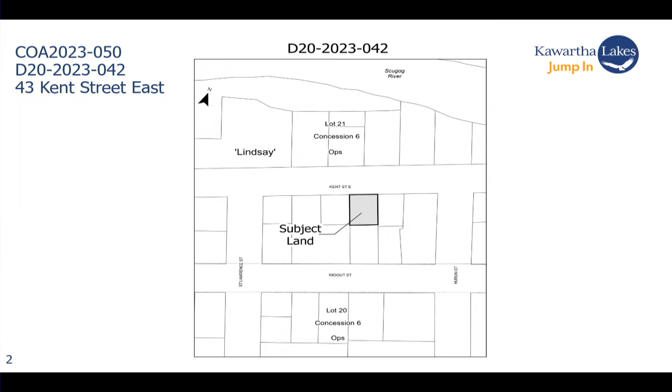The subject property is located in an established residential neighborhood east of downtown Lindsay and south of the Scugog River, separated from the river by residential properties as well as Old Mill Park. The property contains a 1.5-story single detached dwelling with a basement, constructed in 1947, and a shed.

The purpose of the application is to facilitate the construction of a 2-story addition with a basement onto the back of the existing dwelling, as well as the construction of a second story onto the 1.5-story existing dwelling.

Section 8.2C of the bylaw requires a front yard setback of 7.5 meters; the existing setback is 2.13 meters. Section 8.2F of the bylaw requires a rear yard setback of 7.5 meters; the proposed setback is 3.35 meters.

Please note that an amendment to the third relief is required, as it should read that Section 8.2H of the bylaw permits a maximum gross floor area as a percentage of lot area of 40%, not as a percentage of lot coverage. So again, on the first page of the report, relief number 3 should read: Section 8.2H of the bylaw permits a maximum gross floor area as a percentage of lot area of 40%. The proposed gross floor area is 89% of the lot area. This amendment is also required to the text box on the sketch in Appendix C, but the correct wording can be seen here on the slide.

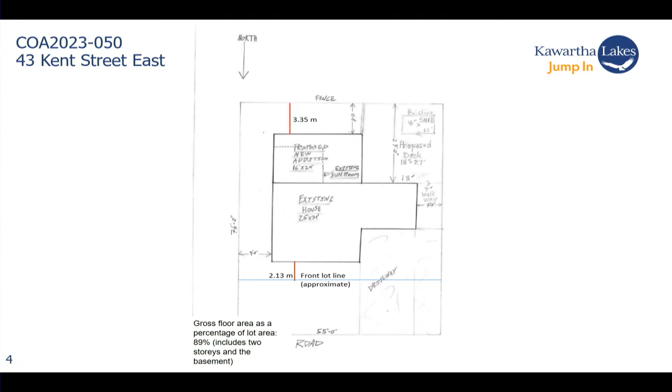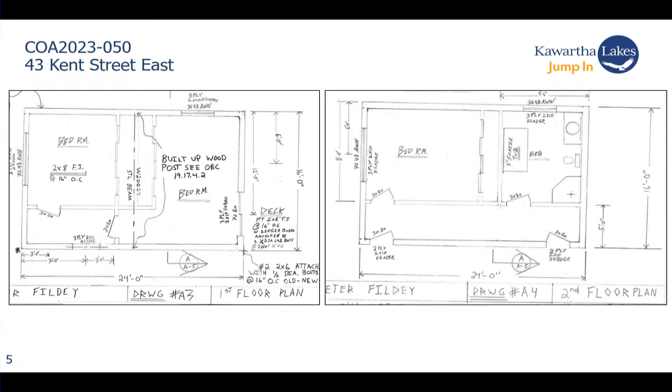The proposal is to construct an addition onto the back of the existing dwelling. This addition is to be 2 stories with a basement, for a total of 3 levels. Here we can see the floor plans for the first and second stories of the proposed addition, and here the floor plan for the basement of the proposed addition.

The proposal is also to convert the existing partial second story into a full story, making the entire dwelling 2 stories with a basement for a total of 3 levels. This proposal will add additional living space, a bathroom, and 3 bedrooms.

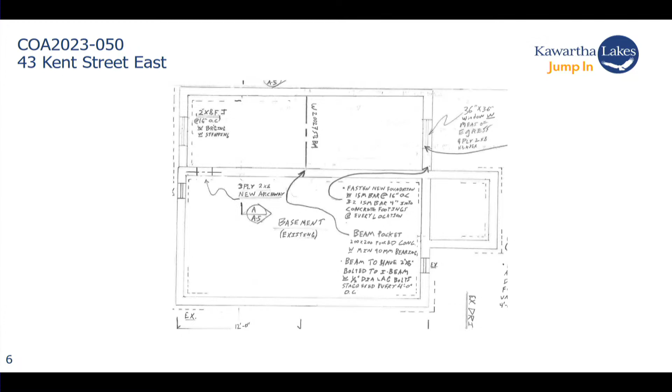As the Lindsay secondary plan portion of the City of Kawartha Lakes official plan is under appeal, the Town of Lindsay official plan applies. Within the residential designation, residential uses, as well as buildings and structures accessory to residential uses, are permitted, with performance and siting criteria being implemented through the zoning bylaw.

The intent of the minimum front yard setback is to ensure adequate spatial separation between built form and the traveled portion of the street, to create a streetscape in keeping with the residential character of an area, and to maintain features such as sightlines.

The proposal is to convert the half-story to a full story, which complies with the maximum height within the R3 zone, and is not anticipated to alter sightlines. Additionally, there is adequate spatial separation between the dwelling and the traveled portion of the road.

The front lawn continues past the front lot line of the subject property, extending to the edge of the road, with the distance between the dwelling and the edge of the road being approximately 6 meters.

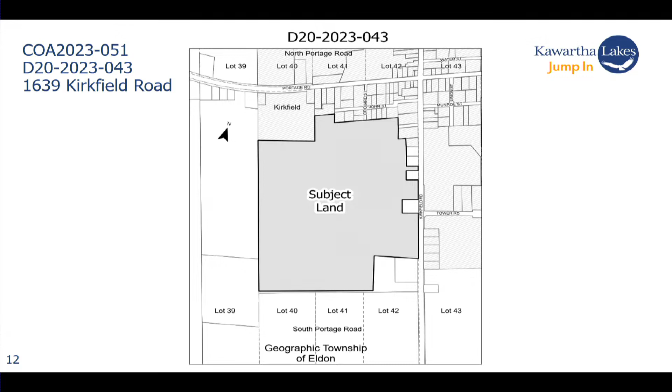Based on the Municipal Property Assessment Corporation, the benefiting lands being 1653 Kirkfield Road contain a single detached dwelling and a detached garage. On the second page of the report, under the official plan review, I mentioned that the retained lands are vacant. This section should be amended as the retained lands currently contain a single detached dwelling, a barn, and an attached garage.

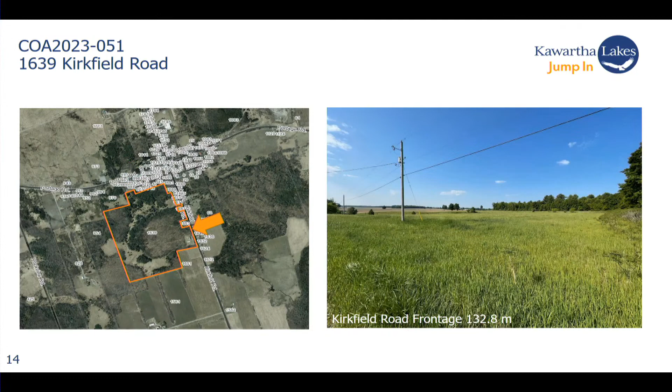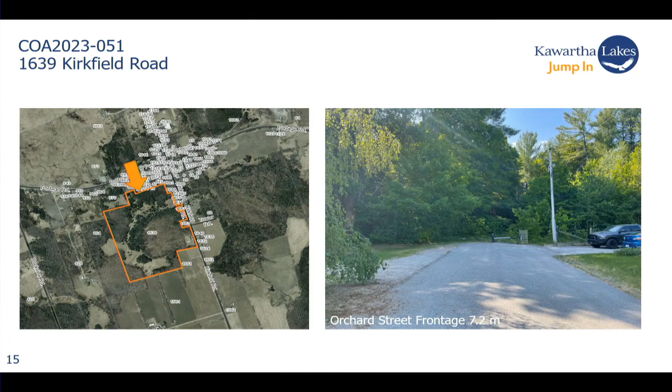The subject property is zoned agricultural zone under the Township of Eldon zoning bylaw. The proposal complies with the provisions of this zone with the exception of the minimum lot frontage. Section 7.2.1.2 of the bylaw requires 230 meters of frontage for properties zoned A1. Due to the severance, the retained parcel will have approximately 140 meters of total frontage on an assumed public street.

The intent of this zone provision is to ensure lots are large enough to accommodate development and to adequately provide amenity space, private services when required, and stormwater infiltration. While the retained lands do not comply with the minimum lot frontage, the proposal meets the minimum lot area under the A1 zone. Therefore, the lot size may adequately accommodate potential development, amenity space, and space for water infiltration.

The minimum lot frontage requirement also ensures the property can accommodate a building envelope with the appropriate width of a lot while still complying with the minimum side yard setbacks. The retained lot is wide enough for future development that can easily comply with these yard requirements under the A1 zone, including the installation of an unencumbered private sewage system. Therefore, the proposal maintains the general intent and purpose of the zoning bylaw.

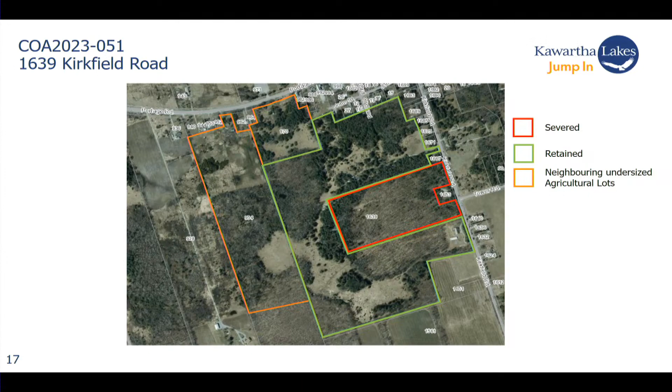No additional comments, concerns, or objections were raised by members of the public or circulated agencies. Based on the contents of the report, staff acknowledges the application meets all 4 tests of a minor variance, and staff respectfully recommends approval of the application subject to the conditions identified in the report.

Thank you. Thank you, Ms. Peck. Other questions of the planner? All right, being none. Mr. Carroll, I see you sitting there. Do you wish to speak to the application?

Yes, thank you, Mr. Chairman. The recommendation at item 1 under relief sought, using the measurements referred to by staff, if you approve 160 meters, the application property does not comply with the 160 meters. You cannot round up. You can round down, but you cannot round up. If you approve a minor variance that says the frontage is acceptable, authorized at 160 meters, we already know to 2 decimal places, it's 159.77. So if you would agree to change 160 to 159, that addresses that concern.

The second one, Mr. Chairman, deals with condition 1. My client cannot fulfill condition 1, and my client cannot fulfill condition 2.

All right, I'm going to go back to Ms. Peck. Did you hear what Mr. Carroll had to say with respect to condition 1? Through the chair, yes. So I am comfortable setting the total frontage at 159.77 meters.

In terms of addressing the member's question about that green retained frontage, that little piece—I'll point to it here, right here—that is not counting towards the total lot frontage because that is an unopened road allowance. It's not like Pine Street, it's not on a municipally improved road, so it doesn't meet the definition of lot frontage. So just to clarify, we have the frontage on Orchard Street, and then we have the frontage on Kirkfield Road.

In a cover letter that was sent on April 24th, 2023, from Mr. Doug Carroll, it does request a lot frontage of 7.62 meters on Orchard Street and 152.15 meters on Kirkfield Road, which when summed is 159.77 meters.

This is as clear as mud. Ms. Archer, go ahead. It still seems to me, if we approve even 160 or 159 point whatever, the sketch—and Mr. Carroll says, I believe, his client gave him the number of 132—if we approve 160 or 159, they're still not going to have enough. Ms. Peck, I have to keep going back to you.

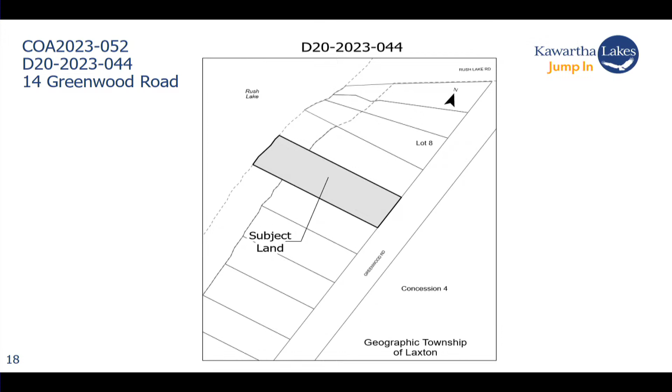Thank you, Mr. Chair. The subject property is located in an established waterfront community located along the east shore of Rush Lake, approximately 600 meters from the intersection of Rush Lake Road and Monk Road. The subject property abuts similarly sized residential lots to the north and south, with a large agricultural backlot located at the dwelling's rear on the east side of Greenwood Road. As expected, over time, owners may wish to improve their property to achieve its highest and best use.

The proposed ARU will not require any exterior building additions, expansions, or reconstruction. The applicant is proposing an internal retrofit of the garage's existing upper level, which currently provides storage space, to accommodate living space as well as a kitchen and bathroom facility. An ARU will provide additional living space to accommodate the owner's family and friends, specifically their daughter who visits during the summer months. An ARU also provides the potential for rental tenure and supplementary income opportunities if desired. This may assist the city in meeting its rental housing and affordable housing objectives. Therefore, the development is desirable for the appropriate development or use of the land, building, and structure.

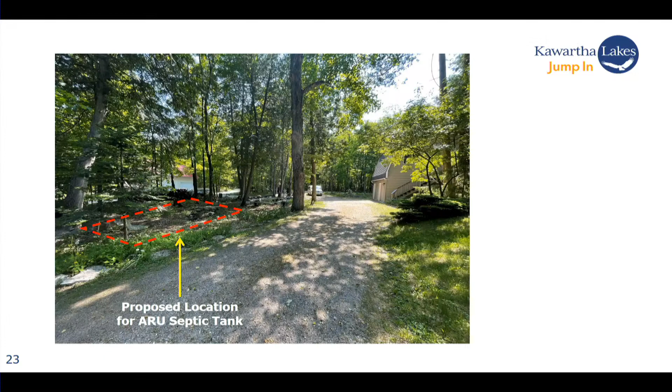Additionally, should the sewage system servicing of the dwelling unit fail, a replacement alternative system can be accommodated on the lot. As such, the Building and Septic Division has no issue with the proposed minor variance as it relates to on-site sewage disposal. Therefore, the variance maintains the general intent and purpose of the official plan.

The subject property is zoned limited service residential under the United Township of Laxton, Digby, and Longford zoning bylaw. The LSR zone permits a single detached dwelling and a detached accessory structure, as well as accessory uses, such as an ARU. Section 18.31 VI of the bylaw permits an ARU as of right on lots 4,000 square meters in size where private services are proposed.

The subject property is 2,024 square meters in size.

The intent of the minimum lot area requirement is to ensure that an adequate carrying capacity of land is maintained to accommodate the necessary sewage system upgrades and water demand.

To facilitate the proposal, the owner is installing a second septic system, and the garage's upper level will provide an additional 12.8 square meters of living space, which is not anticipated to significantly increase the property's water demand.

The proposed ARU will be located on the upper level of an existing building, and no exterior alteration is required. The existing garage complies with all of the yard requirements for a detached accessory structure, and the lot meets all other ARU eligibility requirements under the zoning bylaw.

Therefore, the variance maintains the general intent and purpose of the zoning bylaw.

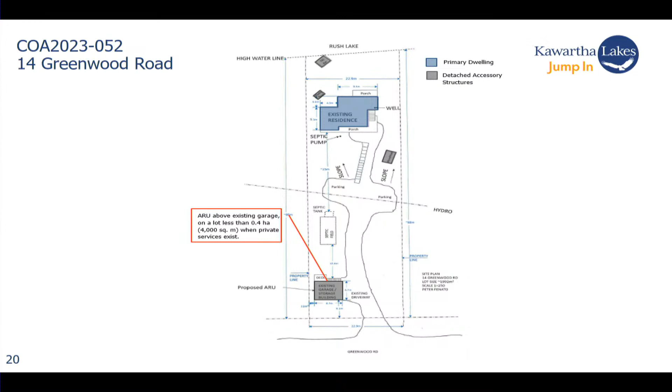There are no anticipated impacts on environmental features, neighboring properties, or the function of the municipal right-of-way with respect to access, drainage, streetscaping, and maintenance, and therefore the application is considered minor in nature.

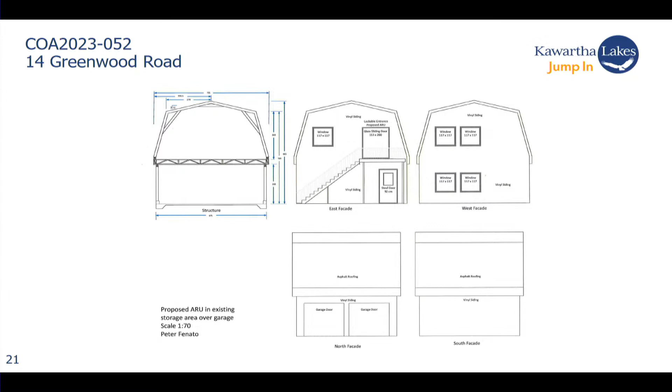No other comments or concerns and comments of objection were received by members of the public or circulated agencies. Based on the contents of the report, staff acknowledges the application meets all four tests of a minor variance, and staff respectfully recommends approval of the application subject to the conditions identified in the report. Thank you.

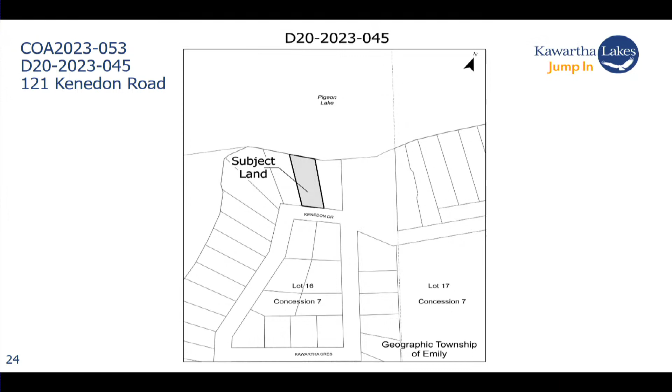Yes, thank you. The subject property is designated waterfront under the City of Kawartha Lakes official plan and is zoned rural residential type 3 under the Township of Emily zoning bylaw. The subject property is located in an established residential neighborhood on the eastern shore of Pigeon Lake. The property is rectangular in shape, has frontage on the water, and contains a one-story single detached dwelling and a shed.

The purpose of the application is to recognize the existing non-complying side yard setback of an addition to the dwelling, which was constructed in 2017. In 2017, the previous owners were issued a building permit to facilitate the addition. The plans submitted to the Building and Septic Division showed a side yard setback of 5.59 meters. In 2020, when the current owners purchased the property, it was discovered there was an open building permit for outstanding deficiencies, which the current owners addressed. At that time, they had a survey done for the purposes of building a fence, and through that survey it was determined that the setback between the side lot line and the constructed addition is 2.85 meters. The required minimum interior side yard setback is 3 meters.

Site plan compliance is a component of a building permit, and the Building and Septic Division cannot close the open permit without the existing non-complying setback being addressed. The owners have taken steps to address this deficiency by submitting a minor variance application for the purposes of closing the building permit to achieve clean title for the sale of the property.

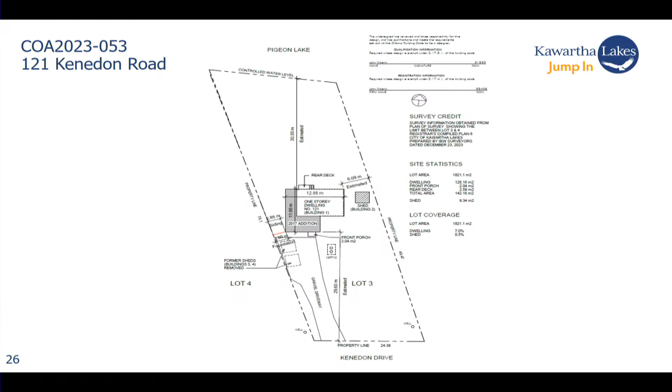Looking to the official plan, low-density residential uses and buildings and structures accessory to residential uses are permitted in the waterfront designation, with performance and siting criteria being implemented through the zoning bylaw.

The approximate setbacks from the property line are shown in red. As per section 12.2.1.3b of the bylaw, the minimum interior side yard setback is 3 meters, and again, the existing setback is 2.85 meters.

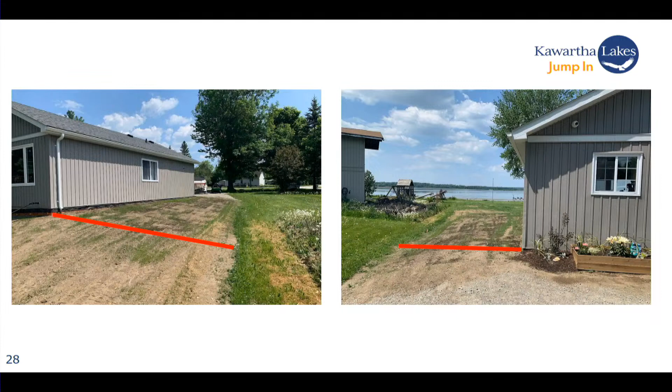The purpose of an interior side yard setback is to manage massing and privacy issues and to provide sufficient space for lot drainage, access between front and rear yards, and building maintenance. The existing setback of 2.85 meters provides adequate space for drainage and allows for unimpeded access between the front and rear yards, as well as room for carrying out any required building maintenance on this side of the dwelling.

In this photo, the edge of the dwelling on the subject property is at the right side of the frame, and the dwelling on the neighboring property is on the left side. The existing dwelling does not directly abut the neighboring dwelling, and therefore no impacts to privacy are anticipated. There are no anticipated impacts on environmental features, neighboring properties, or the function of the municipal right-of-way. No comments of concern were raised by any of the circulated agencies.

Comments were received from the neighboring property owner at 119 Kenedon Drive, and a copy of these comments has been provided to committee members prior to today. Concerns were raised regarding the drainage of water from the subject property onto the neighboring property, as well as concerns regarding the setback between the driveway and the shared property line. In response, water drainage between neighboring properties is a civil matter, and the Emily zoning bylaw does not have a required setback between a driveway and a shared property line.

Based on the contents of the report, staff acknowledges the application meets all 4 tests of a minor variance and respectfully recommends approval of the application subject to the conditions identified within the report.

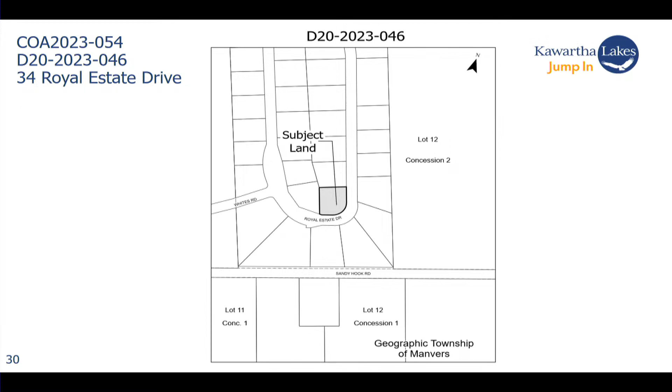Thank you. The subject property is designated rural settlement under the City of Kawartha Lakes Oak Ridges Moraine Policy Area and is zoned Rural Residential Type 1 Exception 5 under the Oak Ridges Moraine zoning bylaw. The RR1 Exception 5 zone contains lot area and frontage requirements as well as minimum front and side yard setbacks that are different from what is required in the RR1 zone. The subject property is located in an established residential neighborhood at the southern end of the rural settlement of Pontypool. The property is a corner lot and contains a single detached dwelling with attached garage constructed in 1991.

The purpose of the application is to facilitate the construction of an addition to the existing attached garage. Section 13.2D of the bylaw requires a minimum rear yard setback of 6 meters; the proposed setback is 3.43 meters. Section 13.2E of the bylaw requires a minimum flankage yard setback of 15 meters; the proposed setback is 10.06 meters.

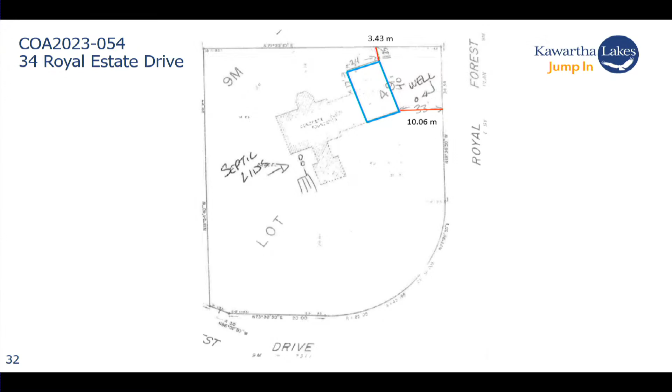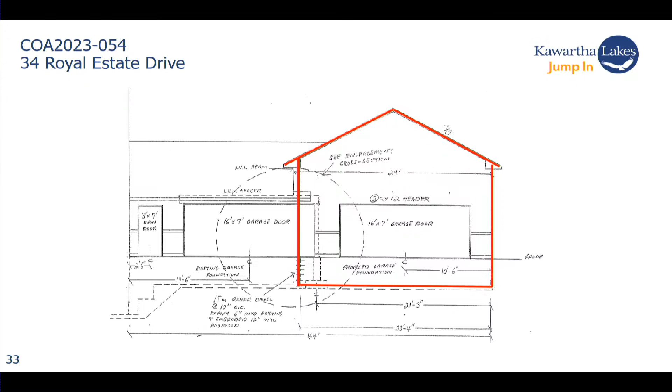The proposal is to construct an addition to increase the size of the existing attached garage. The addition can be seen here, outlined in red. It will add an extra 89.2 square meters of area to the attached garage, which is required to adequately store the owner's vehicles. Looking to the official plan, a single detached dwelling and accessory buildings and structures are permitted within the rural settlement designation, with performance and siting criteria implemented through the zoning bylaw.

The purpose of the required setback from a flankage lot line is to provide adequate spatial separation between a road allowance and an abutting residential use, to avoid land use conflicts between transportation and residential uses, and to prevent impacts to sightlines. The proposed 10.06 meter flankage yard setback will allow for adequate room for snow storage and road maintenance and will ensure sightlines are not impeded.

Additionally, as the addition is for garage space, the proposal will not result in land use conflicts between transportation and residential uses. The bylaw requires an extensive flankage yard setback, and for comparative purposes, other zoning bylaws typically require a minimum flankage yard setback of 7.5 meters.

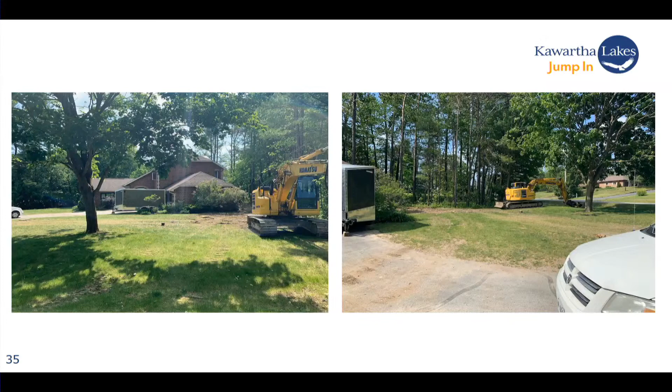The photo on the left shows the rear yard of the property behind the existing attached garage, and the photo on the right is looking through the trees at the rear of the lot towards the neighboring property.

The intent of the rear yard setback is to reduce land use and privacy conflicts between abutting properties, address massing impacts, and provide sufficient rear yard amenity space.

The rear yard of the property abuts the interior side yard of the property to the north, and the dwelling on the neighboring property is approximately 16 meters from the shared lot line. Also, there are no windows proposed on the rear wall of the garage addition. The enlargement of the garage on the subject property towards this shared lot line is not anticipated to result in any privacy or massing impacts.

The existing dwelling and attached garage are situated towards the rear of the lot, limiting the space in the rear yard to be used for amenities. Therefore, the majority of the subject property's amenity space is located within the front and side yards. The addition of the garage extending into the rear yard will not impact the owner's ability to use the rest of the property for outdoor recreational purposes.

There are no anticipated impacts on environmental features, neighboring properties, or the function of the municipal right-of-way. Comments were received from Otonabee Region Conservation Authority stating that they have no concerns and a permit will not be required from their office. No other comments of concern were raised by any of the circulated agencies, and no comments were received from members of the public.

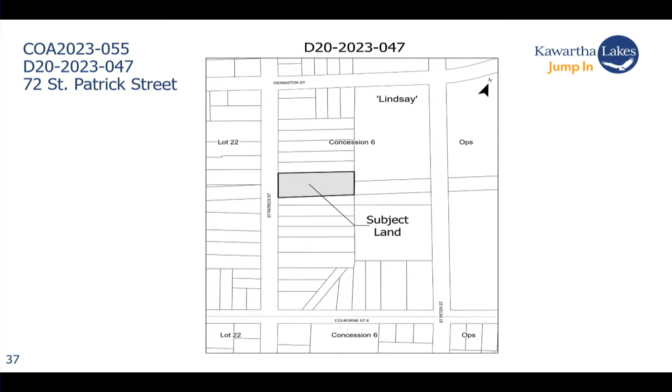The purpose of the application is to facilitate an addition to an existing detached garage for a greater height than permitted under the bylaw.

The design of the garage responds to its intended use by restricting the height encroachment to only the portion of the building where the trailer will be stored. This location abuts an existing driveway and will aid in vehicle parking.

The proposed building addition is located at the property's rear, away from adjacent residential buildings, reducing its potential for negative impacts on adjacent structures due to shadowing or water runoff. Based on this review, the variance is considered desirable for the appropriate development or use of the land, building, or structure. The subject property is designated residential in the Town of Lindsay official plan.

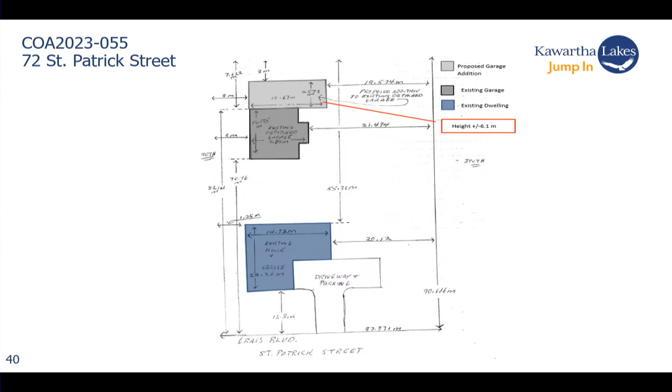The subject property is zoned Residential Type 2 under the Town of Lindsay zoning bylaw. The R2 zone permits residential uses and accessory uses in buildings. Section 5.2C of the bylaw permits a maximum accessory building height of 5 meters. A height of 6.1 meters is proposed.

A bylaw's general provisions may limit the height of an accessory building or structure to protect the privacy, view, and daylighting of neighboring lots, and to ensure the building and its use remain subordinate in size compared to the principal dwelling.

The subject property's primary dwelling will remain taller than the proposed garage addition. Furthermore, the garage is located more than 50 meters away from the primary dwelling unit and the primary residential buildings on neighboring lots. Therefore, the garage's perceived height from the street will be minimized and negative impacts related to privacy and daylighting on adjacent buildings are not anticipated.

The garage addition also has a greater interior side yard setback than required, which reduces the likelihood of water runoff onto the adjacent property to the north. Therefore, the proposal maintains the general intent and purpose of the zoning bylaw.

There are no anticipated impacts on environmental features, neighboring properties, or the function of the municipal right-of-way with respect to access, drainage, streetscaping, and maintenance. Therefore, the application is considered minor in nature.

No other comments or objections were received from members of the public or circulated agencies. Based on the contents of the report, staff acknowledges the application meets all 4 tests of a minor variance, and staff respectfully recommends approval of the application subject to the conditions identified in the report.

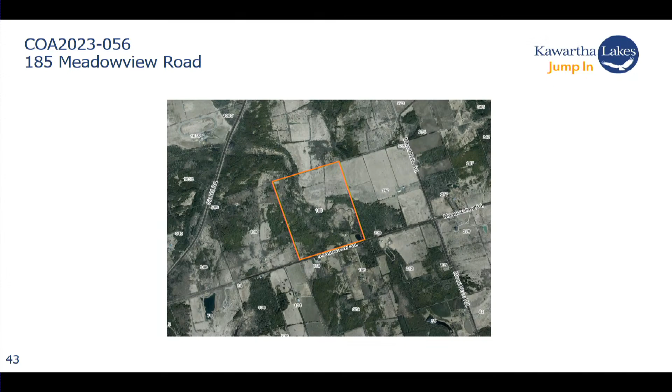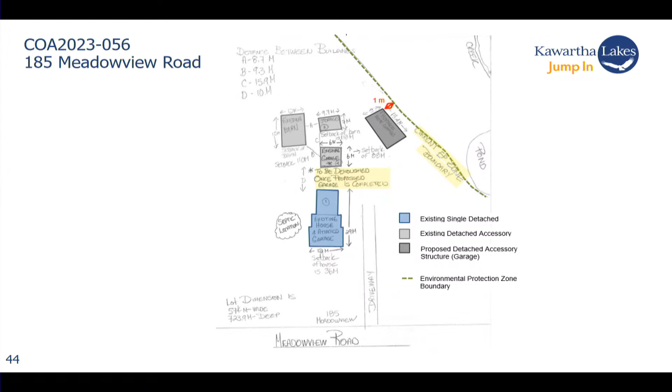The subject property currently contains a single detached dwelling, circa 1875, a barn circa 1930, a second barn circa 1920, as well as a detached garage, which is currently used for semi-dry storage. A new garage is proposed and will provide watertight storage for the owner's vehicles, yard equipment, and personal effects.

In the image above, you can see the existing dwelling and detached garage, as well as the larger of the two barns. In support of this proposal, the owner will demolish the existing garage upon completion of the proposed accessory structure. The existing garage is in poor condition, but will provide a convenient place to store personal effects and construction material until the new garage construction is complete.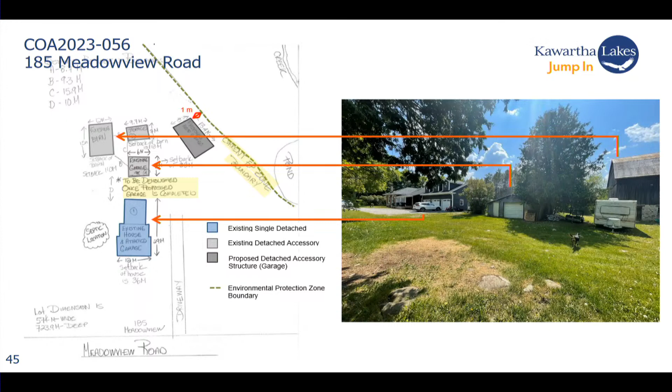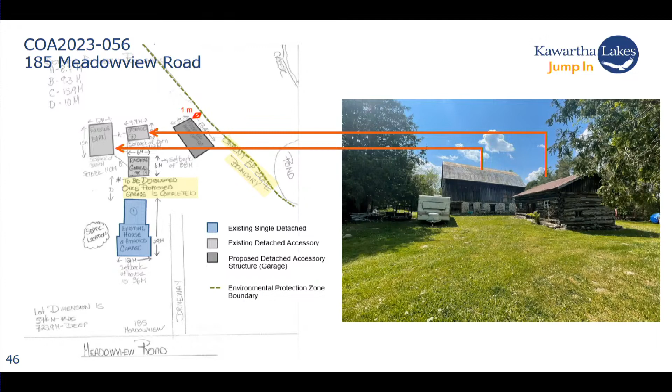In this next image, you can see both of the existing barns located behind the detached garage, which is proposed for removal.

The image above illustrates the proposed location for the new garage, which is located east of the barns shown on the last slide. The selected location is considered desirable as it remains largely cleared of trees due to damage sustained in the May 2022 derecho storm.

The garage is logically located at the perimeter of the cleared land in proximity to the farmhouse and will allow for greater amenity space at the dwelling's rear between the dwelling and the existing barns. I've also illustrated the approximate EP zone boundary, which is along that clearing, between the clearing and the wooded area.

Therefore, the proposal is considered desirable and appropriate for the development of the land, building, or structure.

The subject property is designated rural and environmental protection under the City of Kawartha Lakes official plan. The proposed accessory building is located entirely within the rural designation, which permits a single detached dwelling and residential accessory uses, buildings, and structures.

The subject property is zoned agricultural and environmental protection zone under the Township of Emily zoning bylaw. Section 3.18.1.1a of the bylaw's general provisions requires a 15-meter setback between any building or structure and any class of environmental zone category. A setback of 1 meter is proposed.

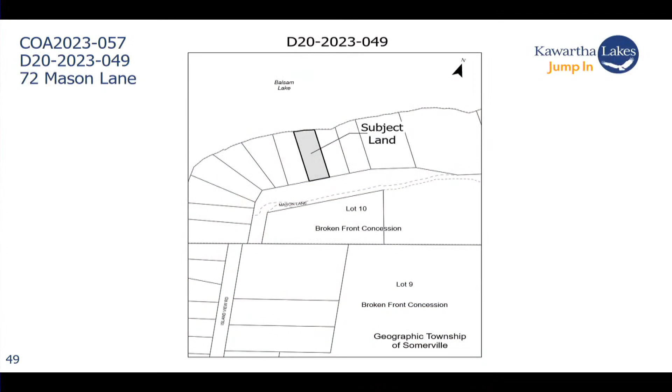The subject property is designated waterfront under the City of Kawartha Lakes official plan and is zoned limited service residential under the Township of Somerville zoning bylaw. The property is located in an established residential neighborhood on the southern shore of Balsam Lake. It is rectangular in shape, has frontage on the water, and contains a single detached dwelling constructed in 2021, a boathouse, and two sheds. The sheds are to be removed.

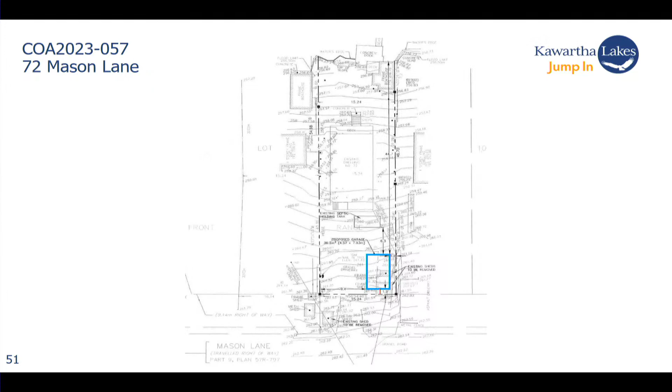The purpose of the application is to facilitate the construction of a detached garage in the front yard. Section 18.1.2b of the bylaw states that an accessory structure may not be erected closer to a street than the required front yard setback for the zone in which it is located. The minimum front yard setback in the limited service residential zone is 7.5 meters, and the proposed setback is 1.2 meters.

These elevations provide an idea of what the garage is to look like. The two sheds currently located in the front yard will be demolished, and the new garage will be constructed in their current location. The new garage is to be approximately 36.2 square meters in size and will provide opportunities for storage on the property.

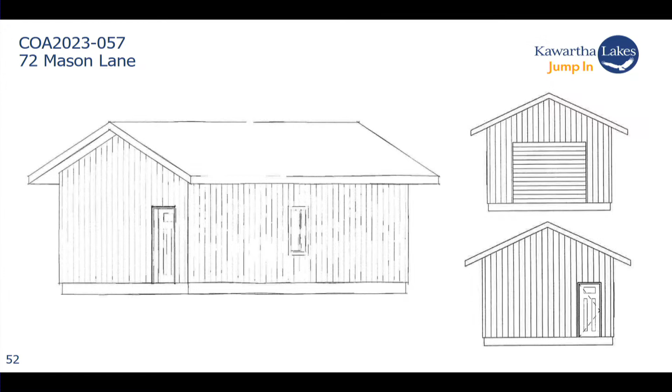Looking to the official plan, low-density residential uses and buildings and structures accessory to residential uses are permitted in the waterfront designation, with performance and siting criteria being implemented through the zoning bylaw.

The distance between the traveled portion of the road allowance and the proposed garage is sufficient to ensure the traveled road and sight lines are not impacted, and vehicles will be able to safely exit the south-facing garage door. Additionally, the garage is to be set back further from the front lot line than the existing shed is today. As there are existing accessory structures on other properties in the area with deficient front yard setbacks, the proposed garage is in keeping with the character of the area.

Through the chair, I left my glasses at home, so I'd better pull it up on my computer. Sorry, if I could just have a moment to read that font there. Good luck.

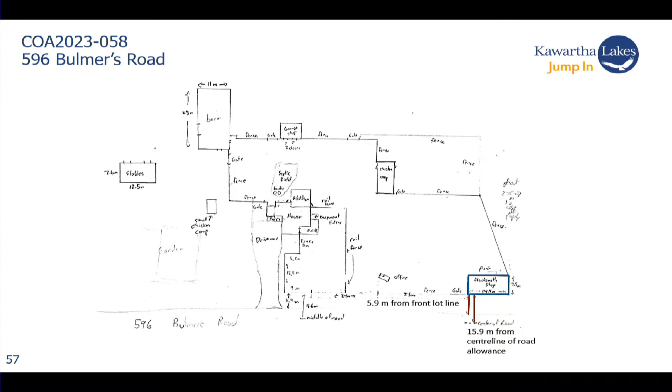Through the chair, that says 2.75 meters from the edge of the property. So that is the setback from the blacksmith shop, which is the proposed ARU conversion, and that is the distance from the side lot line. So in the sketch, just because of how big the property is, they've really zoomed in on where the buildings are. So that interior side lot line is 2.75 meters away from the blacksmith shop.

Thank you. Any follow-up? No? All right, good. Anything further from committee? All right, is the applicant here or online? Does the applicant wish to speak to the application? Is there anyone online or here wishing to speak in support of this application?

Anyone present or online wishing to speak in opposition to the application? Well, we've heard it all, committee. Where are we? Who wants to do it? Ms. Archer, I see your hand there. And Councillor Yeo, all right.

Any further comments or questions with respect to the motion on the floor? All those in favor? And that carries. Thank you.

All right, we are now dealing with D20-2023-051, and this is 6 Ideal Point, Geographic Township of Verulam.

Ms. Peck, go ahead. Thank you, Mr. Chair. The subject property is an existing residential waterfront lot abutting the south shore of Upper Sturgeon Lake. The property is located along Ideal Point, a dead-end, unimproved, and unmaintained road that connects with City of Kawartha Lakes Road 24 to the south.

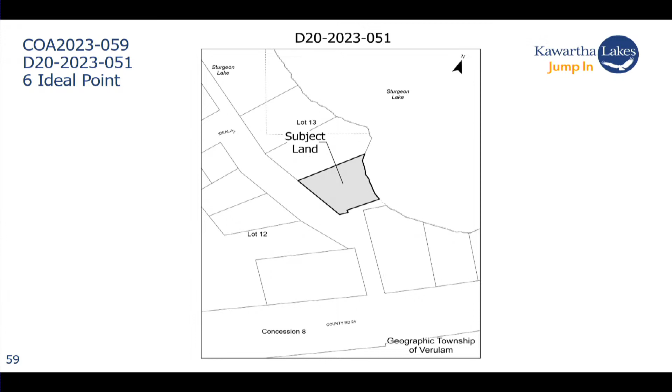The property consists of 2 parcels, a waterfront portion and a backlot portion located south of Ideal Point, as indicated on the property deed. The waterfront portion currently contains a single detached dwelling, circa 1955, and a small wood garden shed, circa 1950s.

As such, the existing buildings and structures are considered legal non-complying as they predate the passing of the Verulam zoning bylaw on March 2nd, 1987. Although not subject to this application, the backlot parcel contains a detached garage.

The purpose of the application is to facilitate the reconstruction of a single detached dwelling and deck, recognizing the existing non-compliances. The proposed reconstruction will provide an additional 19.25 square meters of living space to better accommodate family and guests.

The proposed dwelling will generally occupy the same building footprint that exists today. The proposed building enlargements will take place in logical locations along the north building facade and generally align with the existing building's main wall setbacks. Oh, I'm sorry, I jumped way ahead.

The dwelling will remain 1 story in height, meaning its massing will largely remain the same, and its appearance from the street will also be similar, with the exception of a small covered porch added to the south facade and some changes to the building's fenestration.

A small deck already exists where the covered porch is proposed, meaning its addition is likely not to change the function of the front yard or the private right-of-way.

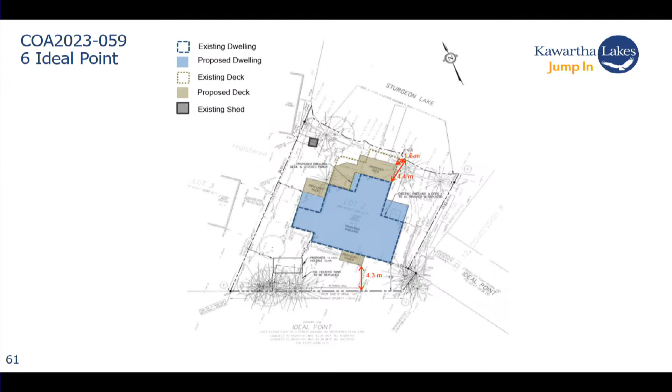The proposal aims to improve the existing water setback conditions and upholds the maximum lot coverage requirements under the bylaw. Additionally, the existing shoreline treatment will remain the same. Therefore, the application upholds the objectives of the waterfront designation and its intent to improve development conditions of shoreline lots and to protect surface water quality through setbacks, minimum lot sizes, and shoreline naturalization efforts. Therefore, the variance maintains the general intent and purpose of the official plan.

The property is zoned limited service residential under the Township of Verulam zoning bylaw. This zone category permits a single detached dwelling and residential accessory uses, buildings, and structures. As per section 10.2D of the bylaw, a minimum front yard depth of 7.5 meters is required.

The applicant is proposing a front yard setback of 4.3 meters to the porch, which is 0.6 meters less than the dwelling's existing front yard setback at 4.9 meters. A bylaw may establish a minimum front yard depth to create a visually consistent streetscape and to provide amenity space and parking areas outside of the traveled portion of the street to ensure safe function of the private right-of-way.

The existing and proposed dwellings are oriented on an angle, meaning that the dwelling's front main wall does not run parallel to the front lot line. In this case, the front yard setback ranges from 4.3 meters at the dwelling's porch to a greater than permitted setback at the dwelling's west corner.

The location of the existing dwelling and porch have allowed for unimpeded and safe vehicle access to the property for 68 years, and the setback between the front lot line and the dwelling's north corner remains adequately sized to still accommodate parking in the front yard if desired. In the image above, you can see the existing parking space located in the front yard.

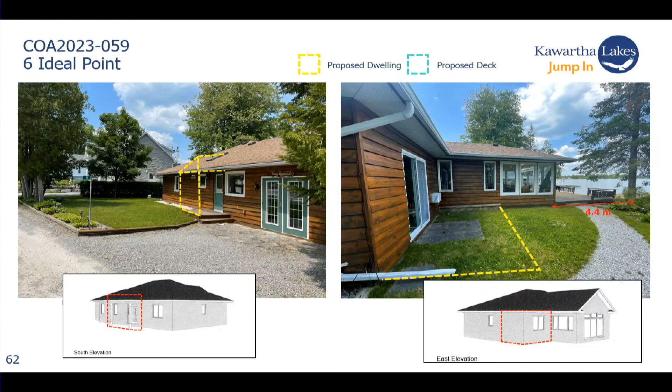The purpose of the minimum rear yard and water setbacks on a waterfront lot is to provide amenity space and to protect the dwelling from natural hazards such as flooding. In this case, the property's side yards provide setbacks greater than required under the bylaw, providing enhanced amenity space. Additionally, the existing and proposed deck space will provide amenity space in the rear yard.

Kawartha Region Conservation Authority was circulated on the application to review potential natural hazards. As a result of this review, Kawartha Region Conservation Authority has no concern with the approval of the minor variance if desired. However, the applicant will require a permit for their proposed work. Therefore, the variance maintains the general intent and purpose of the zoning bylaw.

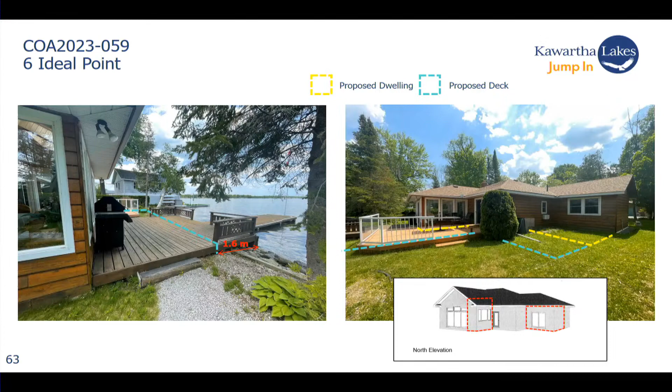No other comments, concerns, or objections were received by members of the public or circulated agencies. Based on the contents of the report, staff acknowledges the application meets all 4 tests of a minor variance, and staff respectfully recommends approval of the application subject to the conditions identified in the report. Thank you.

Thank you, Ms. Beck. Other questions of the planner? Councillor, go ahead. Thank you, and through you, Mr. Chair—not that it matters in my decision or the condition, but what was there first, the septic tank or the well?

Through the chair, I don't know which one was there first. They exist to date, so I couldn't answer that. Maybe the applicant might know. It's just unfortunate because I know on an odd occasion somebody's going to drill a well too close to somebody's existing septic, and it's typically the septic person that has to pay the price. So it's just my own curiosity.

Thank you. Anything further of the planner? All right, Ms. Archer, do you wish to speak to it? Perhaps you could respond to Councillor Yo's question there, with respect to the well and the septic.

Sure, Vanessa Archer from TD Consulting, applicant on the file. I don't have anything additional to add in response to the Councillor's question there. The owner is here as well, and we just conferred—we don't know which one was installed first. It was prior to... however, we can attempt to pull a well record if there is any on the property. That's the only thing we can look at. Councillor Yo?

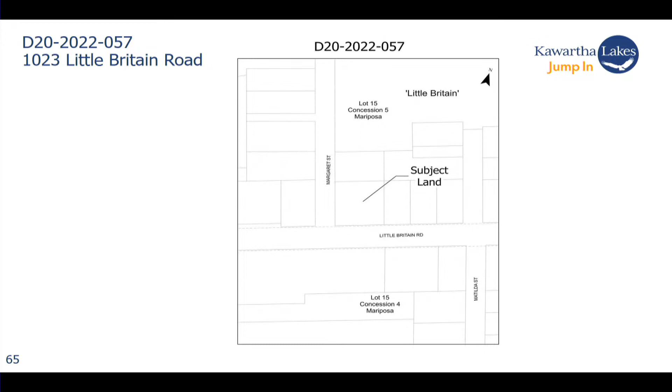In the passage of time and following committee's direction, the owner continued working with Kawartha Conservation, did make application. However, again, as itemized there in the memo, further work was needed. The committee granted a further deferral for an additional 6 months. That was where Conservation Authority and the applicant landed last December. That time period has lapsed. Here we are again, June 22nd, with a further suggestion that committee indulge both the request of the owner and Kawartha Conservation.

We are seeing some progress. The owner has retained both a surveyor as well as a civil water resources and environmental engineering firm to prepare the necessary documentations to take back to Kawartha Conservation for further review. So we are seeing progress on this file, and our recommendation is not to be premature with proceeding with the variance hearing, and instead allow the enforcement violation matter to be addressed and then return to the committee in about 4 months' time, no later than October 26th or sooner, certainly if the matter is addressed, and then proceed with the public hearing for the variance at that time. Mr. Chair, I'll leave it there and receive any questions.

No, thank you, Ms. Berry. Are there questions of the manager?

All right, committee, a motion to defer as it's written there, I guess. Planning staff recommend the deferral be extended, returning at the latest to the October 26, 2023 meeting. So Mr. Strangway moved it. Do I have a seconder? Ms. Richardson? All right, the only thing with these is time, and obviously that is indicated there. So all those in favor? And that carries. Thank you.